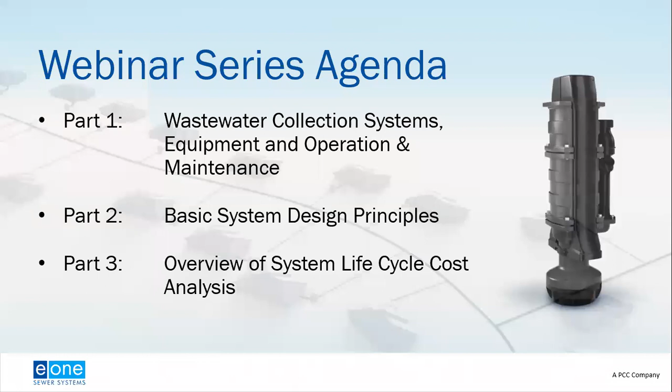When we look at the life cycle cost analysis, we're focusing on the non-technical aspects. In part one and part two of the webinar, as you're working through that process of evaluating sewer alternatives, you're evaluating the technical feasibility of the systems.

So let's say at this point, we now have established that both gravity sewer and low pressure sewer systems are technically viable to service our community. Now we'll start to look at the next layer of analysis, what we term the triple bottom line: the social, the environmental, and the economic cost associated with the project. Just because it's feasible from a technical standpoint doesn't mean it's the best solution, so you want to look at this triple bottom line approach as well.

Then, as part of the economic cost of the triple bottom line, we would look at a structured life cycle cost analysis, because it's important when doing the evaluation to consider all costs associated with the project, not just the initial capital cost. You want to see how that initial capital cost is structured over the project—is it all up front, or can it be spread out over phases?

And you also want to make sure we capture any ongoing costs. One of the problems within the industry, particularly during the Clean Water Fund grant loans, was that money was basically free. It was easy to build a system, and then many operators and utilities found out that they didn't necessarily budget for the cost to maintain that. So when you're doing the evaluation, it's important to look at all aspects of the economic cost.

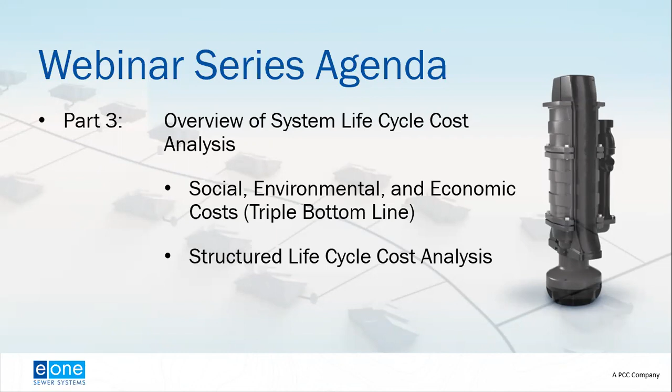Quick recap on where we've been. I believe this is the same slide that was in all three parts, so those of you that have been with us throughout have seen it. But we're looking at two types of systems.

We've got our conventional gravity sewer system that is designed to take advantage of the force of gravity as the prime driver for wastewater flow. The wastewater leaves the house and flows downhill in the gravity pipe to a lower point. The design and installation is dependent on maintaining that constant downward slope so that you're able to maintain minimum acceptable flow velocities to keep the wastewater solids suspended so they don't clog up the pipe.

It becomes a concern when you start to flow downhill and the excavation to install the pipe becomes deeper. Then it gets either difficult, if not impossible, to dig a deeper trench, or if you can do it, it becomes very expensive. And not only is the expense of digging a deep excavation for gravity sewer a concern, the health and safety aspects of that are something to consider as well.

So when you have the conventional gravity sewer, you're going to dig that downward sloping pipe to the point where it's no longer feasible to do so, in which case you would install a lift station that would then lift the wastewater up to a higher hydraulic elevation, and then it can continue either that downward flow by connecting to a trunk sewer, or perhaps it's just a force main that goes directly to the wastewater treatment plant.

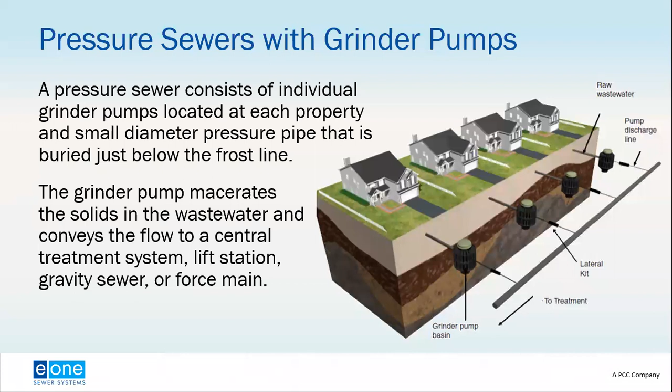This flows either to a central treatment system, or it could be part of an existing larger gravity sewer system. So you might have a 100% pressure sewer system that discharges to a treatment plant, or you might have a pressure sewer system that discharges to a lift station or a gravity sewer system. Usually if it's going into a gravity sewer system, it would be either at the lift station or at a gravity sewer manhole.

Pretty simple process. Every manufacturer is going to have something that looks very similar to this, where you have the basin that is located on each property. Within the basin, you have the pumps. And depending on the manufacturer, everything else could be part of that pump.

In the case of an E/One system, we have the E/One core, where the float controls are part of the pump, or the float sensors that tell the pump to turn on and off are part of the core, as well as the controls itself. So everything is part of that core, and then it sits in a nice little funnel.

With the centrifugal grinder pump, those components will be separate from the core and take up some of the space within the basin. And with the centrifugal pump, you would tend to have a typical guide rail system where the pumps come out by lifting up through the guide rail. But the principles are the same.

The wastewater flows from the house to a standard 4-inch, or depending on local codes, maybe a 6-inch service lateral, flowing by gravity to the basin. Once the water level in the basin gets to the predetermined level, the grinder pump turns on, grinds up the wastewater, and discharges it into a small diameter service lateral. That small diameter lateral would typically be about 1¼ inches or 32 millimeters, then discharge into the mainline sewer—again, a flexible pipe installed just below the frost line.

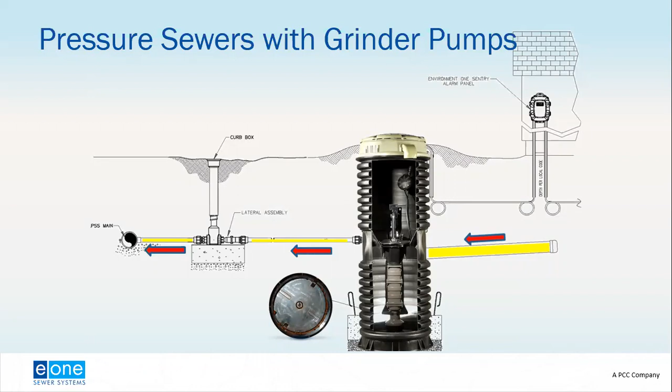So as we get to this point, we've kind of gone through our evaluation. We determined at this stage that gravity sewer systems and pressure sewer systems are technically viable. So we want to start the selection process, and there's a couple ways you can do this.

I've always been a big fan of kind of a matrix system. When you're looking at it, there's two sides you really want to focus on. I think this is true of any decision-making process: you get the objective analysis and the subjective analysis. The objective analysis are things that everyone pretty much would agree on, and you're not going to have a lot of subjectivity to it. That'd be the technical performance criteria.

Does it meet the technical requirements? Can it convey wastewater from the household to the treatment plant? Then you want to look at the economic criteria. That again is very objective. You're not going to have much variance - if you ask 5 people what it costs, you might get a little bit different opinions, but it's not really subjective. It is a more or less objective, non-variable type assessment.

The other side of that, though, is the subjective analysis. This is things where many different people will have many different opinions on which is the better alternative. When we look at the subjective analysis, we're looking at some of the non-monetary criteria. One, is it suitable for the collection basin? Technically, it's acceptable, but that doesn't necessarily mean it's suitable. There are other considerations when we look at suitability, and some of that would be, as we get further into it, maybe the triple bottom line when we're looking at the social cost.

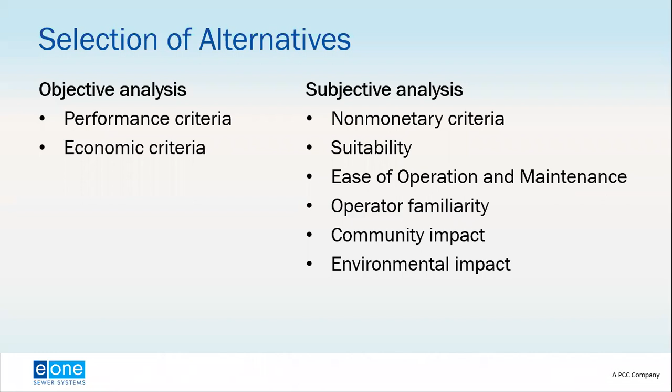Community impact and environmental impact - again, these are part of the triple bottom line where it may or may not be a critical component of the decision-making process. Many people may have different opinions on the value of it or even what the criteria should be for it. But it's something you want to consider, just to say, yeah, we looked at this and from a community standpoint, it is, or maybe it is not okay. And you've got to remember which way to go.

It's a good process to go through and assign a numerical value or thumbs up, thumbs down, something so you can look at it graphically and say, based on this evaluation, here's how we should move forward, or here's the recommended move forward.

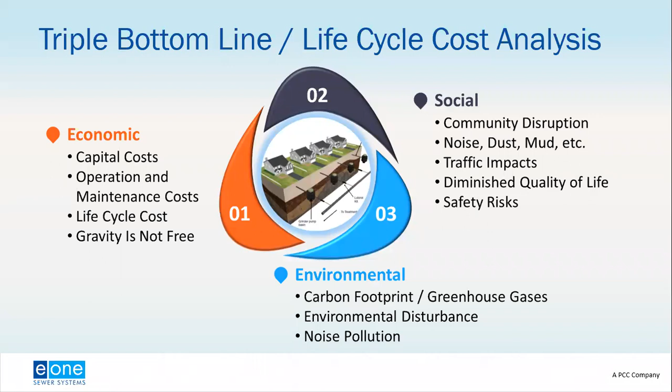Today I'm really going to do a top level look at the environmental cost and the social cost, just to introduce the concepts. These parameters and evaluations would vary depending on where we are regionally or client-wise. Some clients may put more value in the environmental cost than others, and some regulators may require that greenhouse gas emissions be considered.

The environmental cost is the overall cost to the environment. It's always a little hard to quantify, so you have to establish what you're trying to look at in the beginning. But there's a lot more attention being paid to greenhouse gas emissions and the carbon footprint. It's very difficult to quantify what the carbon footprint is for a wastewater collection system, but there are some ways to do it, so that might be a consideration.

The other environmental costs, though, are the ones we would see more often—the disturbance or disruption to the environment that you see directly. Not to discount greenhouse gas emissions, but those aren't something we see tomorrow, whereas digging up a wetland to put in a gravity sewer system is something we will see immediately. So we want to look at those environmental costs of disturbance to the environment.

That could be wetlands, or it might even just be having to clear cut a lot of trees, because with a gravity sewer system you have to go in a straight line—there's no ability to deviate. That might involve taking out trees or other environmentally sensitive areas.

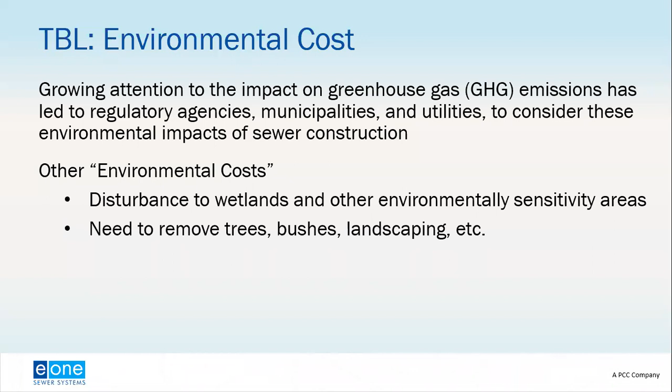I don't know that there's any real magic when we look at the environmental cost of a pressure sewer system itself. It's certainly not any detriment from a greenhouse gas carbon footprint emission, but the advantage is in the construction means and methods. Recalling from the previous two parts, pressure sewer systems can be installed using horizontal directional drilling or low impact cut and cover, so these methods will typically yield much lower greenhouse gas emissions and carbon footprint.

This table I'm showing is from a report comparing the cost of trenchless versus traditional methods of construction. This report was not necessarily focused on wastewater collection systems. It was done by an industry just looking at utility installation, so they considered everything - gas mains, water mains, sewers, anything that was a pipe going underground. They found that trenchless construction methods can result in an 80 to 97% lower greenhouse gas emissions compared to open cut excavation methods.

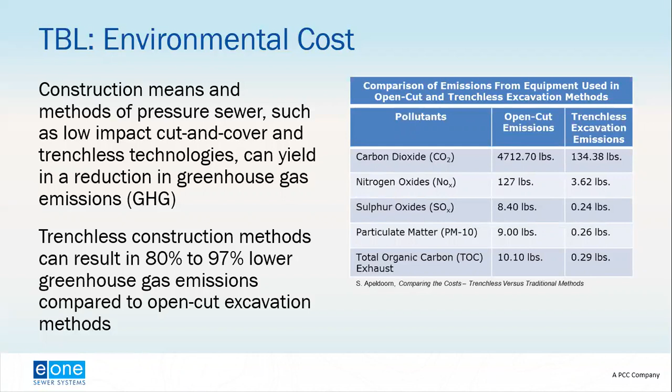So again, there's nothing necessarily about the smaller pipe diameter and the grinder pump located at each property, but the ability to install a low pressure sewer system with low impact cut and cover or horizontal directional drilling methods can definitely have a positive environmental impact.

In addition, as I said, you get your operation and maintenance cost, but you can also look at your energy and greenhouse gas costs. That is really hard to quantify when you want to look at a carbon footprint for a wastewater collection system. The challenge I've always had, in my consultant days when we would look at carbon footprints, is where do you start? Do you start with the equipment manufacturing process? Do you take into consideration what it takes to build or manufacture that pipe going in the ground?

There's not a lot of evaluations on there, but I did find this one report done in 2000, presented at a WEFTEC presentation, where they looked at the energy and carbon emission for gravity sewer and pressure sewer systems, looking at the total life cycle cost - basically the cradle to grave evaluation of the energy cost associated with manufacturing the pipe, transporting it to the site, installing it, running the system, and bringing it to the treatment plant. I also believe they looked at the disposal process. It was a very comprehensive evaluation, the only one I've ever seen.

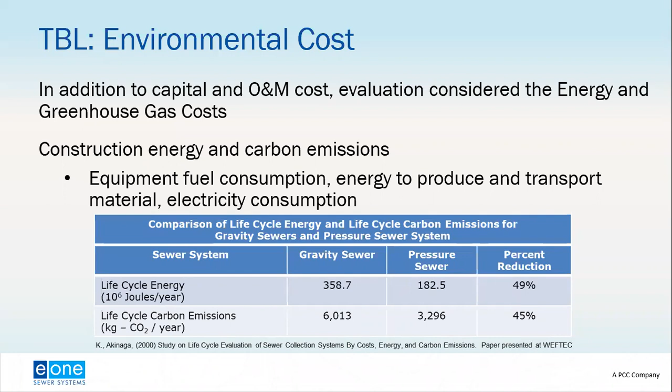Here we can see that when we look at pressure sewer versus gravity sewer, and we look at the life cycle energy and life cycle carbon emissions, there is a significant percent reduction of about 50% - the pressure sewer advantage over the gravity sewer system. So that's where we see a lot of the environmental costs. And again, one I don't have a table for is taking out a tree, avoiding wetlands.

Then we look at the social cost. Social costs are those indirect costs associated with work that is paid for by the community.

As a young engineer, when I was doing construction inspections, that was when I learned about social cost. The contractor's installing the pipe, I'm the construction inspector standing there making sure everything goes according to the plans and specs - not much more than that. That's an indication to the homeowners to say, hey, that's the guy I want to go yell at and find out when they're going to be done digging up the street. I have to go 4 blocks out of my way just to get down to the store. That's the cost that society pays.

It's the business losses, the diminished quality of life, the traffic disruptions, noise pollution, depending on where you are. If you're digging a very deep gravity trench in the middle of the summer, in some parts it's going to be dusty, it's going to be dirty. If it's not dry and it's very wet, that dirt is going to be mud, and that can create a lot of headaches within the community.

Also, it's a big concern with worker safety. There's a cost associated with worker safety in terms of spending, but the big thing is it doesn't matter what safety plan you have in place - if something goes wrong, that is a bad social check that's being written by somebody. And then in addition to that, damage to paved surface areas, utilities, and adjacent structures.

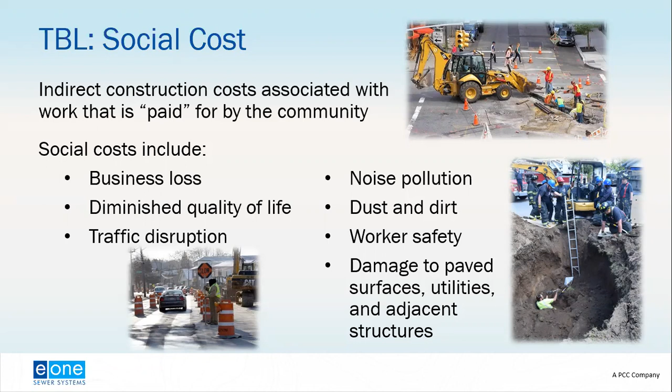So when you do the evaluation, you decide we're going to go with this way - what are the impacts? Not looking at just the technical feasibility and the economic feasibility, but what are the impacts to the community? The social costs will vary depending on where you are, and they're also going to be unique to every project.

When we look at the social cost, again, it's not that there's anything magical about a pressure sewer system, but it comes down to the construction means and methods. With pressure sewer systems, you have a smaller pipe buried just below the frost line that can deviate horizontally and vertically. You don't have to run a straight pipe going downhill at a constant slope like you do with the gravity sewer system. So you have a lot of flexibility.

You have horizontal directional drilling or low impact cut and cover. So this means less damage. Also, the contractor is able to install more pipe in a shorter time period, so the productivity of the sewer installation is quicker. That means the contractor's crews are going to be on site for a shorter period of time.

So they're not taking up all the good parking spaces - less construction time and disruption. Also, there's a potential for less impact to existing utilities. With a gravity sewer system, it will always be the lowest utility in a utility corridor. With a pressure sewer system, you have to maintain the required separation between water and sewer, but you have a lot of flexibility in getting around other obstacles. So it doesn't always have to be the lowest utility, or if it does have to work around other utilities, it's easier to deviate that small diameter pipe horizontally and vertically.

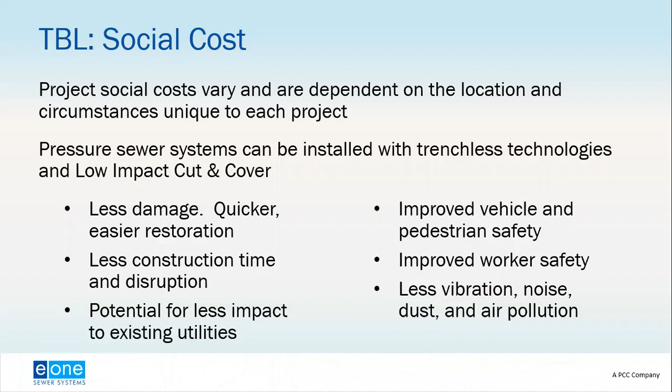I talked earlier about when I was a construction inspector - back then we were actually called inspectors. Now I believe the term is construction observer, because you don't want to tell the contractor something unless it's a definite health and safety risk. But you want to make sure that you're not tearing up the street, that you're not disrupting the community.

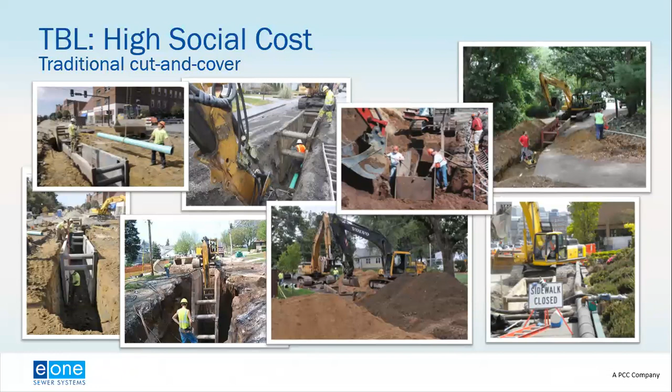Compare that with a pressure sewer system where you have that construction means and methods - the low impact cut and cover, the horizontal directional drilling. With the pressure sewer system, we're not installing the pipe down the middle of the road, so you don't have to shut down the whole road. The pipe can be installed either on the shoulder, but still within the right of way, or if it is in the road, it can be off to the side. So you can still have a lane of traffic open, or even maybe two thinner lanes of traffic open, so you're not disrupting the traffic flow and you're not disrupting the community.

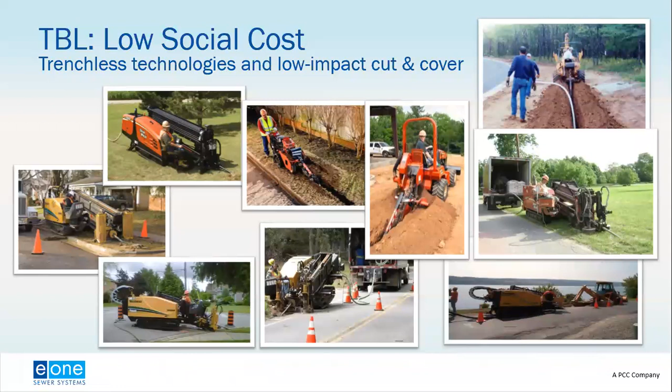A lot less restoration with these methods versus with the conventional methods with conventional gravity sewer. So those are the first two components of our triple bottom line, the social cost and the environmental cost, and that is the subjective analysis. Because it is subjective, it tends to have less of an impact in the decision-making process. It's always going to come down to, when we're doing an evaluation, what makes the most economic sense.

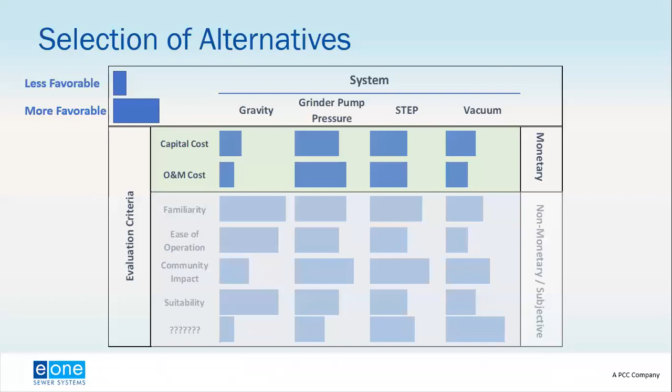So then we look at the monetary component of our selection matrix, focusing on the capital cost and the O&M cost. When we look at the economic cost of our triple bottom line, which is also called sustainability - you might hear the term triple bottom line or sustainability, but it's basically the same thing, looking at social, economic, and environmental.

Turning our attention to the economic cost, a few things we want to look at: that initial cost, the capital construction cost, both for the public components in the public right of way, as well as the on-property components. Then you have your project cost. These may not vary much, and this is defined by each project, but generally that's going to be the cost of construction observation, administrating the project, closing out the project and commissioning it. Those costs can vary somewhat between a gravity sewer system and a pressure sewer system - you're not going to have a lot of variance.

Where you might see the variance is if you can install more feet per day of a pressure sewer system compared to a gravity sewer system, your construction timeline is going to be shorter. Therefore, your construction administration cost, your observation cost, and all of that would be reduced.

Once we get through that initial cost, capital cost, or project cost, we want to make sure we consider those recurrent costs. There are two components to the recurrent cost. The first is your operation and maintenance—the annual cost you're going to have every year to operate and maintain the system. The other recurrent cost would be the repair and replacement cost, or R&R cost. Combining this, you'll sometimes see it reported as OM, R&R.

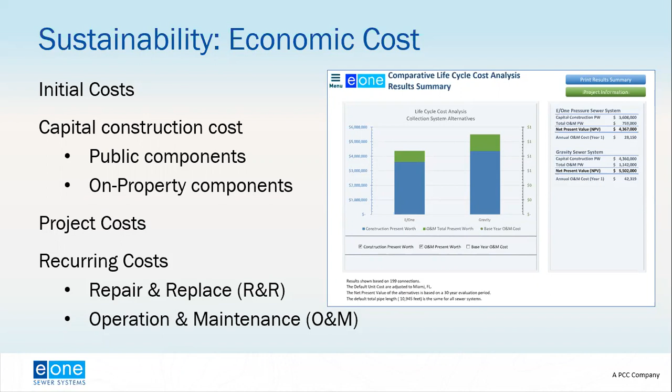When we look at our cost, it's always nice, if not required, to look at it from a life cycle cost analysis. Life cycle cost analysis is a process that evaluates all the current and future costs necessary to construct, operate, and maintain a sewer system.

With life cycle costs, we're looking at both the capital expenditures and the operation expenditures. Again, your engineering, construction, and project administration are your capital costs—generally reported in current year dollars. Your operation and maintenance, and your repair and replacement, would be future year dollars.

In the case of operation and maintenance, that's a cost you're going to see every year for the next X years. Repair and replacement might be a cost you see in year 15, or for another piece of equipment, maybe year 20. You want to make sure you understand how you're handling those repair and replacement costs while doing the evaluation.

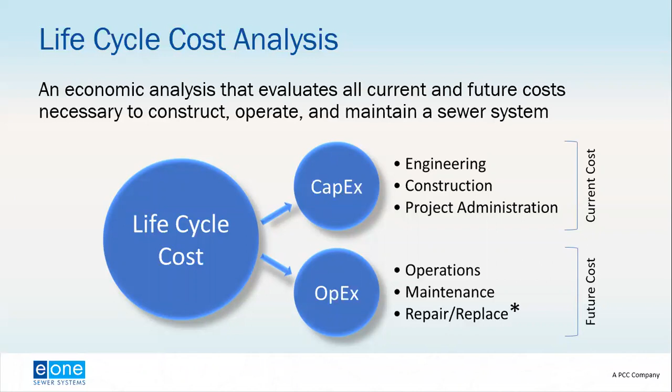The importance of a life cycle cost analysis is that it provides a structured method for a standardized assessment of sewer system alternatives. You want everything evaluated on equal footing. You don't want one person evaluating a pressure sewer system in one office, and another person evaluating a gravity sewer system in a different office, come up with a recommendation, and find out their life cycle cost analysis wasn't done to a standard format.

Therefore, it's not really a comparable evaluation. On its own, the results may be correct or acceptable, but when you look at it through a comparative lens—when making the selection of an alternative—you want to make sure the process is consistent and repeatable. The key thing is it provides decision makers with all the information needed to make a responsible decision. At the end of the day, someone has to decide that we're going forward with a pressure sewer system, or it happens, we're going forward with a gravity sewer system. They want to make sure they had everything necessary to make that decision and that they can defend it to the ratepayers.

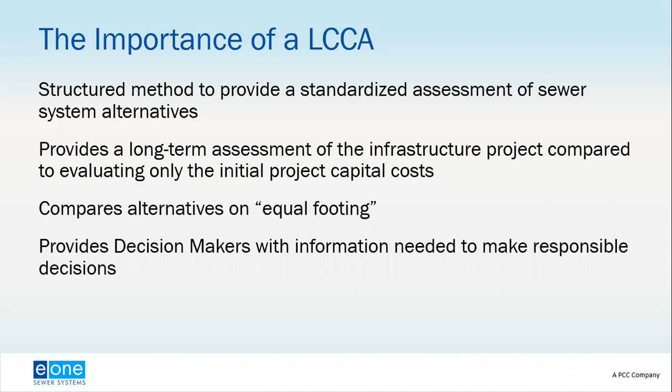Life cycle cost analysis is evaluated in a present worth process, so it converts all costs to a present value. These costs, again, are your initial capital construction cost, your initial project cost, your operation and maintenance cost, and your future repair and replacement cost. You use standard economic formulas to do this evaluation.

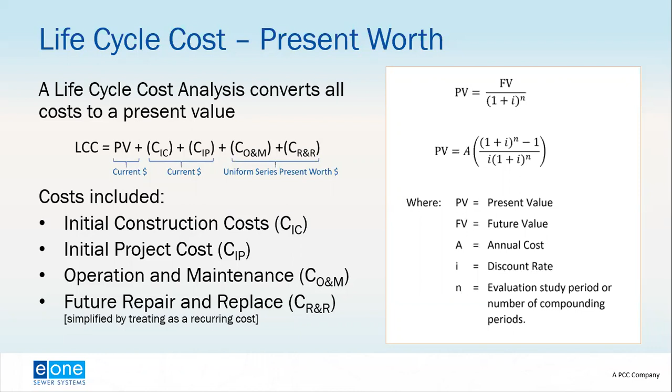Looking at the formula on the left-hand side of this slide, LCC equals PV plus... a lot of the current year dollars would already be in present value. So when doing the evaluation, here's the construction cost in present year values. But we want to bring all the future costs, the operation and maintenance, repair and replacement costs, forward using the uniform series present worth formula.

That just brings everything forward. You have your I, which is your discount rate, the economic factor, the cost of money. And then N, the number of periods you're evaluating. So you look at those costs that occur year one all the way up to year N and bring them forward into present year value.

Now, how you handle the repair and replacement: you could say you have a cost of replacing a component in year 5, year 10, year 15, and look at each of those and bring it forward.

What I like to do is treat it as an annual cost. So if I have to replace something in year 5, I'd take that number, divide it by 5, and say every year for the next 5 years, or 20 years, I'm going to put this much money aside so I have that replacement cost when it becomes due. It makes the process a little easier, and it really doesn't change the bottom line number.

What's important to remember is this is a top level evaluation, so you're looking at a lot of unknowns. There's guidance on what the discount rate is, but we're guessing on what things will cost in 5 years, so it's an evaluation. Applying a future cost in year 5 and bringing it forward versus distributing it over 5 years and bringing it forward isn't going to change the overall number much, and it's certainly not going to change the evaluation process at all.

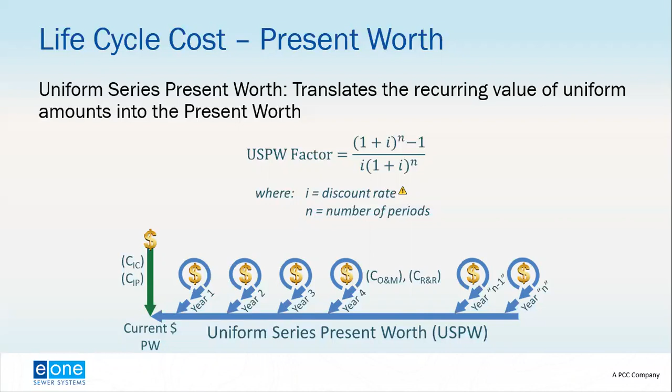When we want to do the present worth analysis of the life cycle cost, the first thing is to make sure you understand the system and establish the system parameters. Look at that initial construction cost, including the project cost. You also want to look at operation, maintenance, repair, and replacement costs, making sure you capture everything: what are those activities, what is the frequency in which that activity occurs, and what are the costs associated with it.

It might be an iterative process where you say, okay, I've got to do this and this, so let me include that. As you work through the process, that's one of the benefits of doing a life cycle cost analysis, particularly a structured cost model - it forces you to think and say, did I remember this? Should I include this? How do I handle that pump replacement in year 20? You want to make sure you capture everything and figure out how to handle it.

You also want to make sure that when doing the collection system evaluation, you account for the projected wastewater flows. You'll recall from part 1 and part 2 that a key difference between gravity sewer systems and pressure sewer systems is infiltration and inflow, where you have the base wastewater flow, but with gravity systems you also have groundwater and stormwater entering through deficiencies in the pipe. You don't have that infiltration and inflow problem with pressure sewer systems.

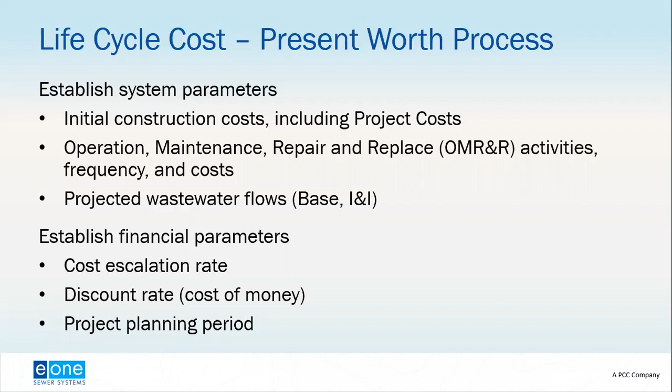And then you want to look at the project planning period. It's generally going to be somewhere between 10 to 40 years, but you want to make sure you capture all the costs that occur over time. If you have too short a period, you're not going to capture all the true operation and maintenance costs. If you have too long a period, you're starting to make guesses on what something's going to cost 50 years from now, and we certainly don't know what that's going to be. So you want something that kind of falls in a nice sweet spot.

Again, this is something that might be governed by whoever's lending the money for the project. Funding agencies will usually say, if you're going to bond this project for 20 or 30 years, the life cycle cost analysis has to meet that period. If it takes you 30 years to pay back that loan, they want to make sure you did an evaluation to show that this is the most economical, viable solution going forward.

I always like to say there are 4 cornerstones in my assessment of a life cycle cost analysis when we look at the keys to success. That is a system that is repeatable, that you do it the same way every time, and everyone who does it does it the same way every time. There's some flexibility, which is the second cornerstone, where you can change some of the factors, but the process itself should be structured and repeatable. You do want it to be flexible though, because everything's not the same throughout the communities we'll be working in. That leads us to the third cornerstone.

You want it to be localized. How something is handled in California would be a lot different than how something might be handled up in Toronto or Quebec or in Florida, or we get into Minnesota. It's all going to be different, both in terms of the construction cost, the construction impacts, but also in terms of what the costs are and how we address it.

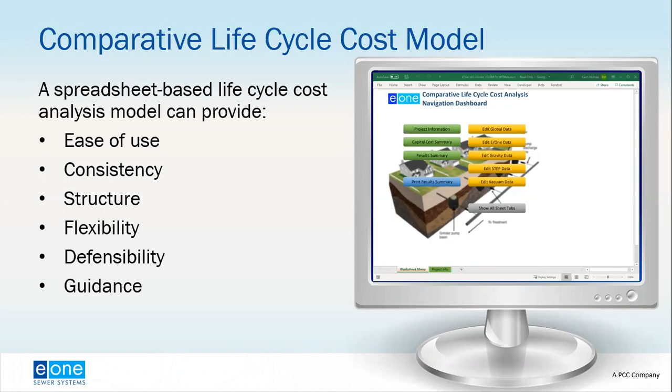That leads me to the segue where the spreadsheet is a nice tool to do a life cycle cost analysis. So Rachel mentioned in the introduction, we have our life cycle cost analysis model, and a link will be forwarded to the attendees of this. Our life cycle cost analysis model is a spreadsheet-based model that provides ease of use, consistency, structure, flexibility, defensibility, and guidance. Those are really the critical components as we look at a system.

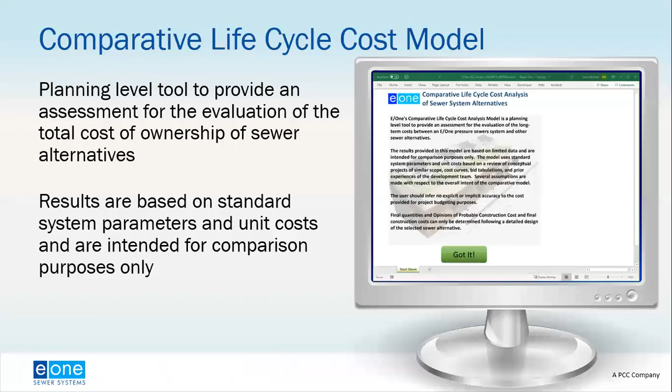It is a planning level tool to provide an assessment of the evaluation for the total cost of ownership for sewer alternatives. So it is the early stages of the evaluation. The results are based on standard system parameters and unit cost, and it's really just intended for comparison purposes only. We're kind of using global numbers to start that process. It can be refined as your information becomes more detailed, but really it's just a top level approach.

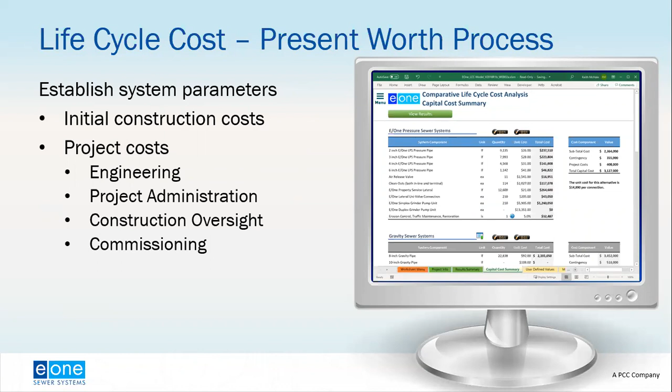These are not necessarily E/One projects. These are things we've compiled into a database of projects that looked at either bid tabs from projects that were pressure sewer systems or gravity sewer systems, or third-party evaluation reports where they may have evaluated both.

And we find consistently, based on our experience, that the typical cost savings for pressure sewer systems can be 35 to 50% over a gravity sewer system.

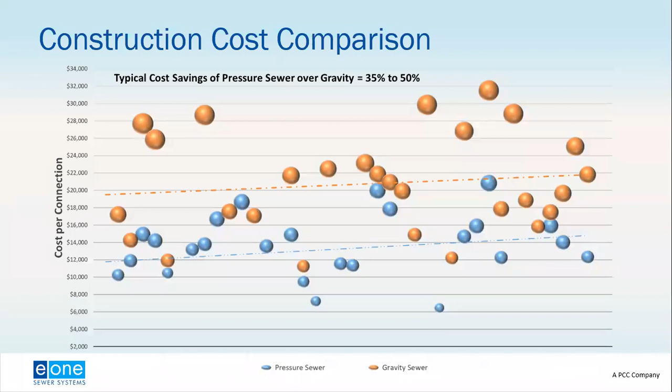The construction cost drivers - I touched on all these points - but with gravity sewer systems, you have larger diameter pipe, deeper excavations, and many lift stations. It'll tend to have more extensive restoration with larger environmental disturbance.

One thing I'd say anecdotally, the biggest component of a change order when doing gravity sewer systems is subsurface - either rock you didn't know was there, and in most cases, potentially higher dewatering costs. With the pressure sewer system, you have smaller diameter pipe with shallow excavation or horizontal directional drilling, following the contours of the land.

So you have less need for that constant downward slope - if the terrain changes a little, you can just set 3 feet, 4 feet, whatever it is, and keep that constant depth. That makes construction go faster.

You have few, if any, basin area lift stations. With the pressure sewer system's smaller diameter pipe and quicker installation, you have smaller equipment, smaller crews, and less environmental disturbance costs. That's a big cost savings when you have fewer people working for less time to install a sewer system.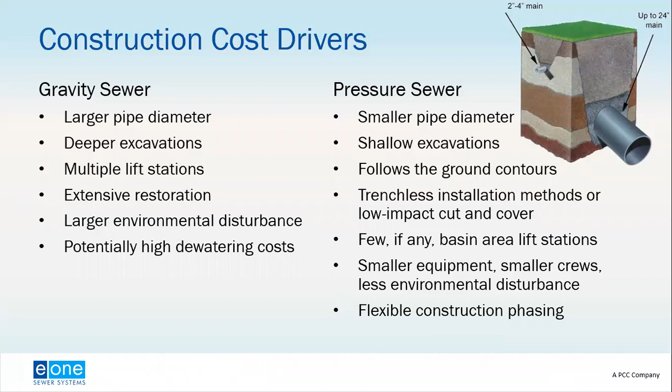You also have a lot more flexibility in construction phasing, so you can do just the mainline sewer now and come back later to do the on-site components. This graphic really illustrates the difference.

This is from a lot of third-party reports evaluating pressure sewer systems versus gravity sewer systems. I broke it down into main components: mainline sewer, appurtenances - which are your manholes, air release valves, cleanouts - the on-property component, the restoration, and the lift station. This shows the breakdown.

What's really interesting here is, as you'd expect, the on-property cost component is higher with a pressure sewer system. But the advantage is that if you're installing a pressure sewer system, you can install the mainline sewer first. Based on this data analysis, for a pressure sewer system, the mainline sewer in the road is 23% of the comparable cost for a gravity sewer system.

So if you're looking at construction phase-in where you don't have the full project budget now, you can install the mainline sewer now, and in second, third, or subsequent phases of the project, go back and install the on-property component.

This is also a big factor with a new housing development, where the developer is only responsible for installing the mainline sewer. The homeowner, once the house is sold and turned over, is responsible for installing the on-property component.

So it's important when doing that cost analysis to not only look at the high-level comparison of gravity versus pressure sewer systems, but also how that cost is distributed and how the flexibility in phasing impacts the economic evaluation.

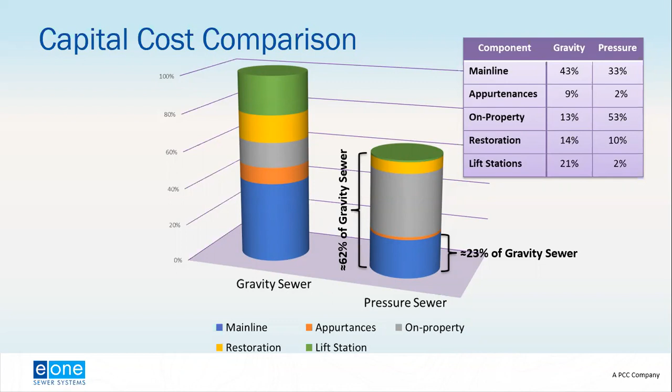So then the next component, once we get through the capital cost, is establishing the system operation, the equipment maintenance, the equipment repair, and the equipment replacement.

I have a sub-bullet on short-lived assets. If you're working on a state revolving fund in some communities, you have to account for how you're going to replace any asset that has a life less than 15 years. So you want to make sure you capture that and include it.

As I mentioned earlier, you want to go through your operation, maintenance, repair, and replacement and look at all the activities, the frequency, and the cost. With the life cycle cost model, we have some default values and parameters in there to remind you, hey, have I considered this? If you did consider it and don't think it's required, you can zero it out. But it helps make sure you go through that process of what is my OMR&R, what are those activities, have I captured everything. It's very important that you go through that process.

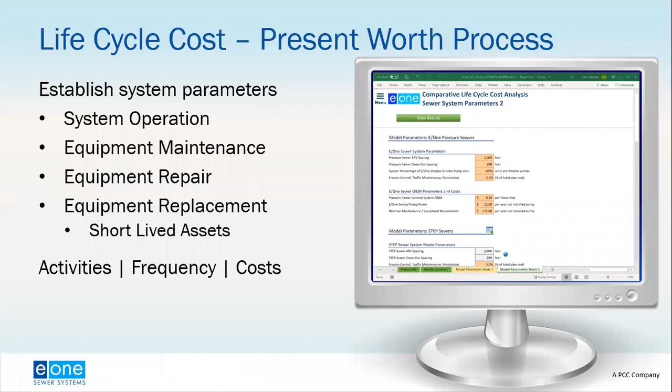Particularly when you're looking at maintenance, I mentioned earlier one of the things we'll hear from time to time is people like gravity sewers because once it's installed, it's free. That is not the case. I once had a conversation on that point, standing next to a $600,000 vac truck. A $600,000 vac truck is not the definition of a free gravity sewer system. So you have to have that ongoing maintenance.

You want to have some proactive maintenance. With the gravity sewer system, you have to TV and clean the system regularly. With an E/One semi-positive displacement pump, there's no real proactive maintenance. You want to keep an eye on it to see when it's time to maybe replace a stator, or is something not quite right, should I take a look at that. So there's a little bit of preventive maintenance, not necessarily proactive maintenance.

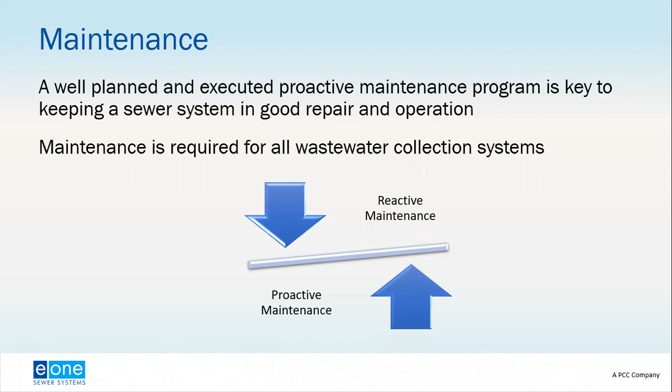But when we look at the components, you have proactive and preventive maintenance, and you want to make sure you address that so you don't have to spend money on the back end on reactive and emergency maintenance.

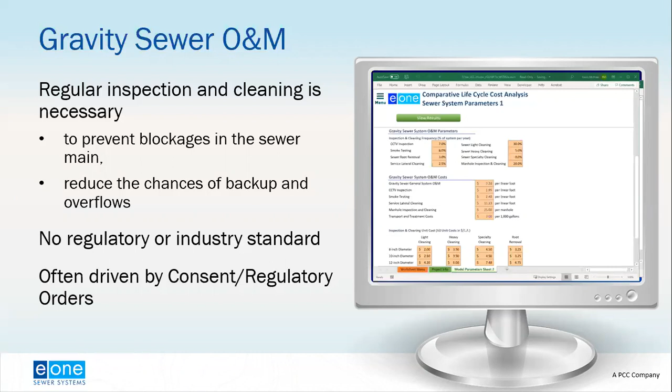With the gravity sewer system, regular inspection and cleaning is necessary. You don't want to have any blockages within the system. Unfortunately, with horizontal assets buried in the ground, we don't see what the problem is. So if a municipality is not regularly inspecting their system, they're going to have problems, and that problem is going to come through a discharge through a manhole, a basement backup, or a lift station overflow. So you want to maintain that.

Usually it's part of a consent order, but here's a table that shows US EPA guidance, where they recommend that you inspect CCTV 7.8% of the sewer system annually, and clean about 30% of your sewer system annually. So you want to have that ongoing inspection and cleaning process of your mainline sewer and manholes. The table on the right, which adjusts the cost for current year values, shows that CCTV inspection is about $7,000 per year per mile. So if you don't account for this cost during the evaluation process, you're only looking at the initial capital construction cost, and that's a big cost to get hit with later down the road.

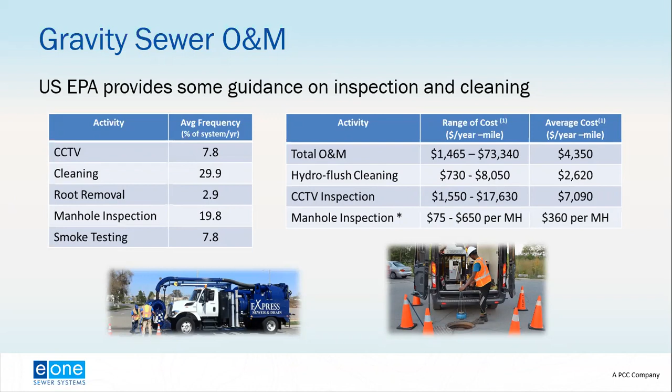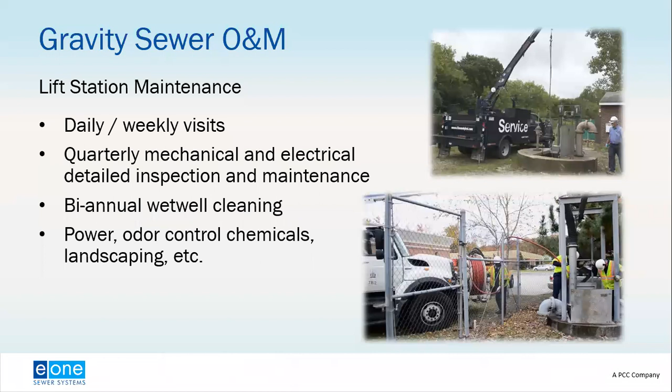When you're looking at cleaning, that's $2,600 a mile, and if you have to do 20% of your system because you have backups, that is a very big unplanned cost. You also have the gravity lift stations, which require regular visits, daily, weekly, quarterly visits, and wet well cleaning. You also have concerns with power, odor control, chemicals, and landscaping at the plant. It's going to vary depending on the size and location of the lift station, but it's definitely an O&M component that has to be accounted for during the process.

Now we look at pressure sewer systems O&M. One concern you might hear is, you've got these 200, 300, 500, 1,000 grinder pumps located at each property. Well, these grinder pumps, particularly the E/One progressive cavity grinder pumps, are more like an appliance. Our DNA comes from a group of engineers who went on to found Environment One, but at the time were General Electric engineers, and they developed this process with an appliance mindset.

So there is no preventive maintenance. The life expectancy of the pump is about 15 to 20 years, in some cases even more, with a mean time between service of these pumps of about 10 years. We also look at the cost of ownership. The electrical is normally borne by the homeowner, and that's generally much less than $25 per year, probably closer to $15 or $10 per year.

When we look at a collection of pumps and see what is the cost of maintaining those pumps over the life of the system, we find—and we have many case studies that back this up—that the annualized pump maintenance cost is about $30 to $50 per year per installed pump. Now, I want to be clear that when there is a pump repair, it does not cost $30 to $50. But if you had a pressure sewer system with a large collection of pumps, and you put aside $30 to $50 per year for each installed pump, when you do have that service call, with a mean time between service of 10 years, you have that reserve fund to pay for those costs.

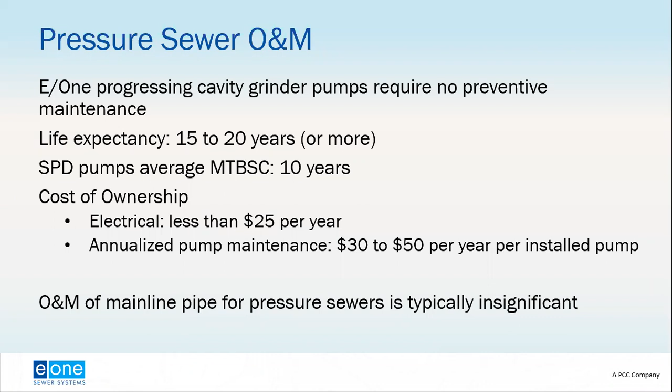On the mainline part, generally we have not seen any significant mainline pipe issues for pressure sewer systems—generally it's insignificant. We have many systems where they will install a cleanout that they can flush if they have to, but generally there is no O&M of the mainline sewer required.

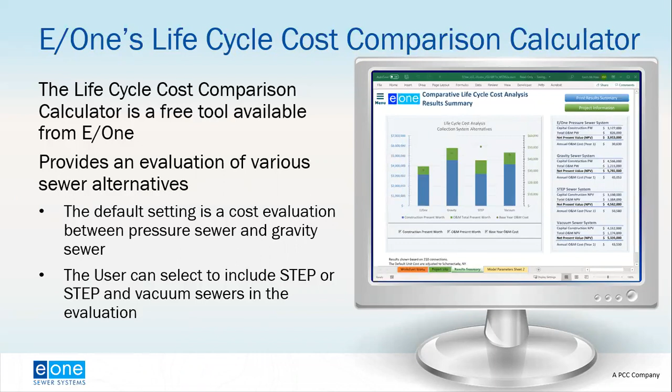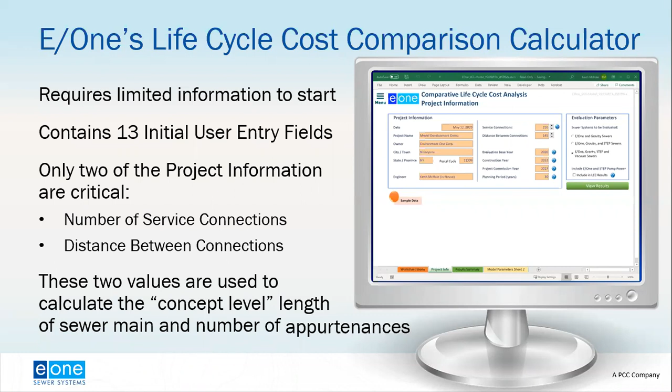So when we look at the life cycle cost comparison calculator—a tool that was mentioned—it's available on our website for free, and it provides the evaluation for various sewer alternatives. It requires very little information, just the number of service connections and the distance between connections, and it can provide a quick assessment of the life cycle cost value for the sewer system selected. You can select gravity and E/One, or add septic tank sewer systems or vacuum sewer systems. As I mentioned earlier, these values are concept level because it just uses some model parameters.

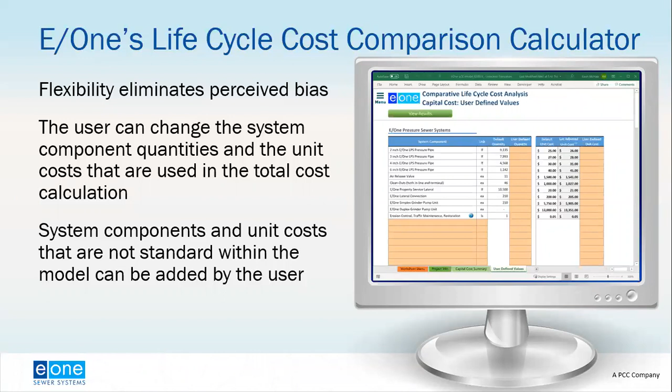But the key part is it's flexible. Any parameter used to calculate the system requirements or cost requirements can be changed by the user. So all of these fields with a component with a user-defined or unit cost can be changed by the homeowner, by the user. On the operation and maintenance side, there are components for suggested O&M with an associated default value cost—those parameters and costs can be changed. So there's a lot of flexibility, so we don't have that bias in there.

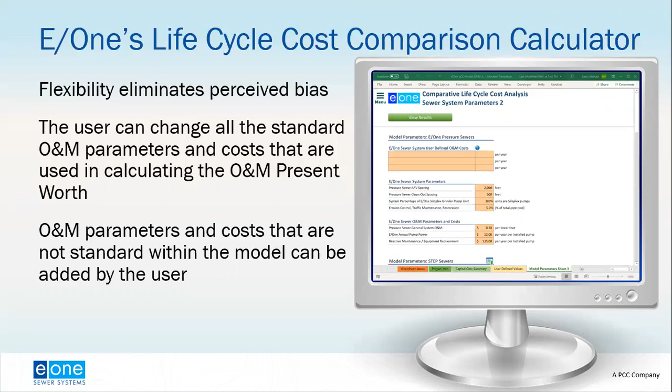It provides a standardized approach that eliminates bias but is also defensible. And if you're looking at the O&M and there's a parameter in there that we don't have as a standard, you can add something to it. So when you sit down and ask, okay, what operation and maintenance do I have in this—well, you don't want to miss that, so let me add that. But again, we want it to be a standardized approach. You can go in, change the values, and get the results you're looking for.

When you do that, that completes the third component of the evaluation process of going through what is technically feasible. Now we can wrap up what is economically feasible, put it all together, and with the results from the life cycle cost analysis cost model, you have something that is defensible. And when the owner or client says, well, what if?—you also have the flexibility to change those values and address those what-ifs.